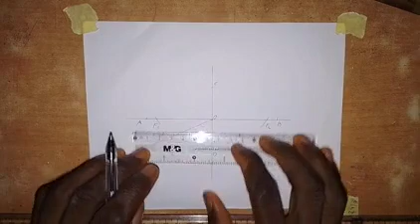Alright, so the next thing we are going to do is divide OF1 and OF2 into a number of equal parts, and this is how I'm going to do it. Just take your ruler, draw this line in this direction, draw a line in this direction, and do the same thing here, drawing a line in this direction.

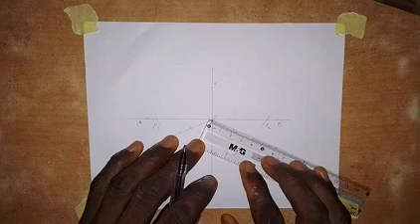Alright, so I want to divide into 4 equal parts, so I'll just take 10 millimeters. This is 1, 2, 3, and here is 4. Then do the same thing on this side: 1, 2, 3, and 4.

Okay, so join the last one with F2 here. Join the last one with F2 here. And here we join the last one with F1.

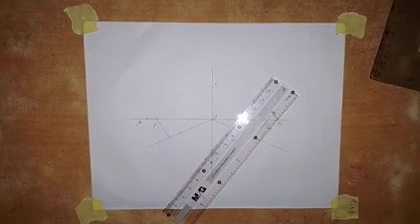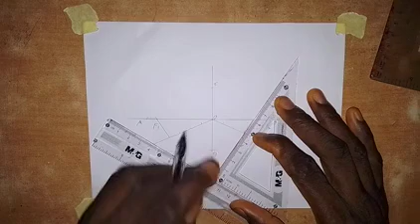Now we are going to draw parallel lines to this. I want to make use of a small set square, so we set the set square along this line. Then we shift it to the next point and draw a line, shift to the next point and draw, then the last one, draw a line. Then we set the set square here on this line, support it with the ruler, shift to the next point and draw, shift to the next point and draw, shift to the last one and draw. Alright, so we have this.

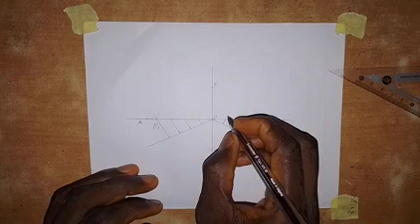So now we are going to number this point as 1 prime, 2 prime, 3 prime.

Okay, so leave this one, just leave this. So then we have this to be 1, so this is 2, and this is 3. So leave the one at the focus.

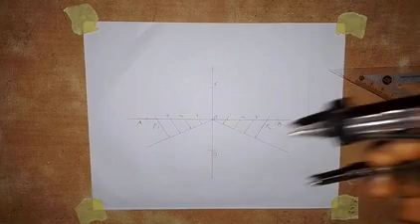So the next thing we are going to do, I'm using left hand, so you can use right hand, or probably you are using right hand, so you can make use of point B. But I want to use point A for my own, though I use both hands, but I use this left hand more often than the right hand.

So from A here, extend to 1 prime on the right side. So take this radius A1 prime, raise it up, put it at F1 here, and draw an arc up and down.

So with the same radius, put it at F2, and draw arcs up and down.

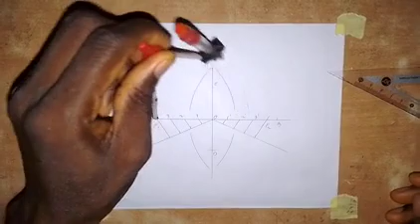Alright, so from A again, go back to A, extend to 2 prime on the right side, raise it up, put it at F1, and draw an arc up and down. Make sure the arc is close to this part, the upper part and lower part.

So then with the same radius, put it at F2, and draw arcs up and down here. Then from A again to 3 prime on the right side.

So raise it up, put it at F1, and draw arcs up and down. Then take it to F2, same radius, and draw arcs up and down. Alright, so we have completed that.

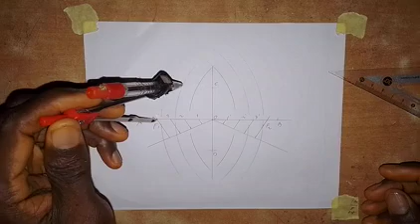So the next thing we are going to do is from A to 1 on the left side here. So raise it up, put it at F1, and make an arc here and an arc here on the first arcs.

So then put it at F2, and make an arc on the first arc and also on the first arc here.

Then from A to 2, raise it up, put it at F1, and make an arc on the second axis.

So then put it at F2, and make arcs on the second axis, up and down.

Then the last one is from A to 3. So raise up, put it at F1 here, and make an arc on the third axis, up and down.

Okay, so then take it to F2, and make arcs on the third axis. Alright, so we got this done.

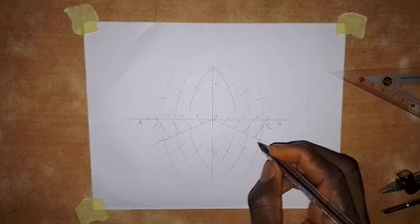So let's see the point. So point B is going with it, and point C, it goes like this. And point A is part of it, so we have this. Also point D is part of it.

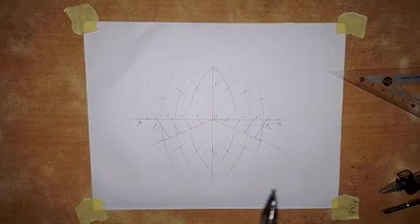Alright, so we take the French curve to join the points together. Starting with this, adjust your French curve to cover all of it. Okay, so it goes like this.

So then, just take it easy, and it goes like this. So we have completed that part.

So coming down here, this goes like this. Then I'll connect this with point D, bringing it here. Okay, so this may not be. Alright, so I need to take this.

Alright, so we get this done. So this is the ellipse as we have it here.

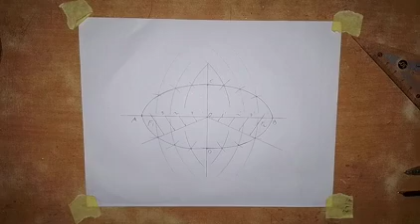So the next thing that we are going to do is we are asked to construct an angle of 120 degrees somewhere. Here we are going to make use of a protractor.

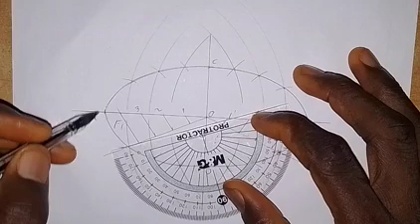I'm going to put a point somewhere at this point here, okay so this is one. After this point A, we have points, this point and this point. I want to put the point here. So with my protractor being set...

This angle 120 is not clear to me, so I'm just going to omit that. But I'm going to put a point here, and I will call it point P.

Okay, so this point now I'm going to join it together with F1, and join it together with F2 for us to construct a tangent. That 120 degree angle, I think the question there is not really clear, so just join P, PF1 and PF2 together.

Then we are going to bisect this angle. So with the compass at point P, you draw an arc like this.

This is the second quadrant that we are asked to put the tangent in. So with the pinpoint of the compass here, draw an arc down here, then bringing it to this point, draw an arc here.

Alright, so the next thing to do is draw a line from this point of intersection of the arcs through point P. So we draw a line like this, then we make this line a thick line from here to here. So this line is a normal line.